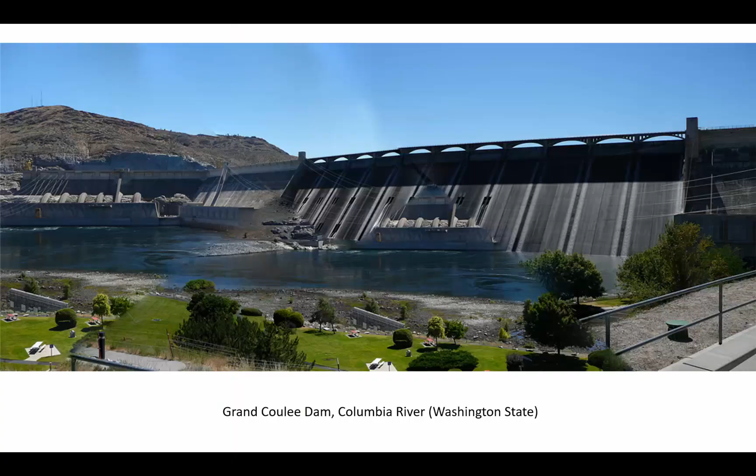The Grand Coulee Dam, which dams the Columbia River, has a multitude of really beneficial uses. On the one hand, it's excellent for flood control. They have the capacity to smooth out the peak flows that would come during periods of wet weather. They can retain that extra water behind the dam so that communities downstream that otherwise might be threatened by highly variable flows don't experience that same damage. So it has flood control benefits.

It also generates electricity, which is really valuable. Much of the Pacific Northwest benefits from hydropower. The cities of Portland and Seattle, I think, both get a big fraction of their electricity from hydropower. And another function of the Grand Coulee Dam is to control the elevation of the water upstream.

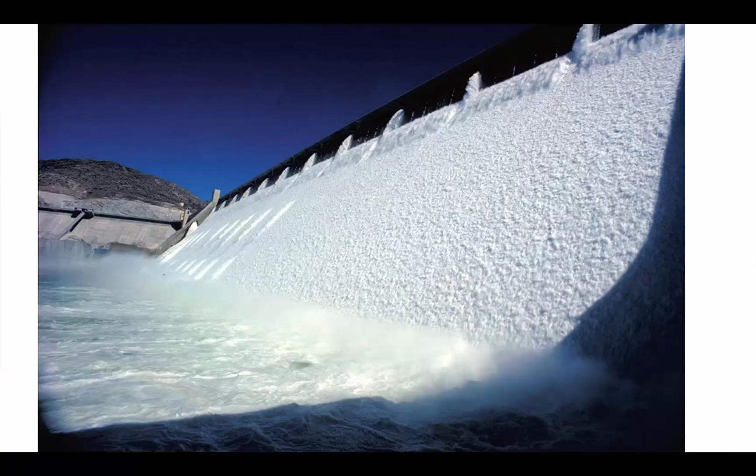The water that comes down the front face of that dam picks up a lot of speed. It's a tall dam. I maybe should have looked that up so I could put the statistic on here. But the flow down the front spillway of the dam, when the spillway is operational, means that the flow is going supercritical down that steep slope. And we're going to talk, starting next week, about hydraulic jumps. Hydraulic jumps are when you have supercritical flow that transitions to subcritical flow.

Thanks, Luke. 1483. I wonder if that's the elevation above sea level. That may not be its height from the base of the dam to the top of the dam. That would be spectacularly tall if that was the net height of the dam. I'm guessing that's probably its elevation above sea level. Logan says 550 feet from top to bottom. Thanks for looking that up. That's still pretty dang tall, though. 550 feet.

So we have to really understand a lot about what the flow is doing when it comes down the front face of the spillway. It's going to be moving at a fast velocity. And one of the things that Bernoulli's equation tells us about high velocity is that it can come with localized low pressure. This is more of an issue in enclosed conduits, where there's a penstock or a pipe that has the water from a dam going through it and discharging to the river below. If the water is moving really fast through that pipe, there can be locations where the pressure drops below the vapor pressure and there can be cavitation.

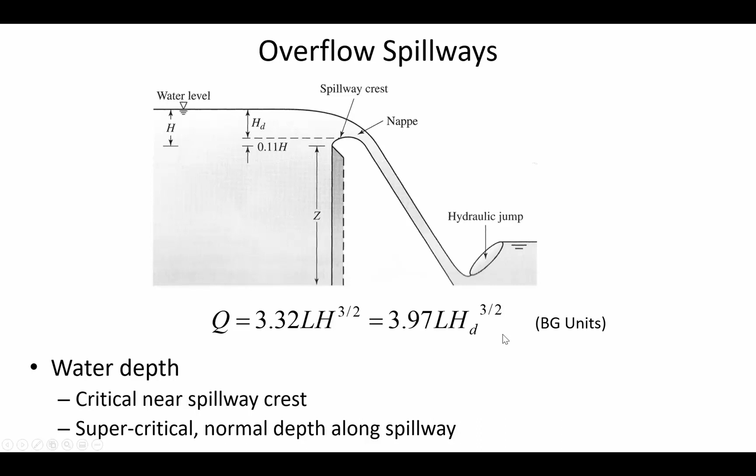All right, so just to get a feel for how this equation works, we're going to say that we do know the elevation of some structure upstream, that we want the water level no deeper than 4350, and that would be the elevation above sea level. So if the water level should not exceed 4350, then what we're trying to figure out is what elevation the spillway crest should be built at. And we know what our anticipated maximum flow over that spillway is going to be.

So we want to pick the elevation for the spillway so that it can pass 38,000 CFS. So if there's 38,000 CFS, there's going to be a certain height above the spillway. Now it may be that this is for the 100-year storm. So what if the 1,000-year storm comes around and there's 45,000 CFS? That just means that the water level would be even higher. But our analysis for purposes of this example is just figuring out what elevation should the spillway crest be at if we have this 38,000 CFS.

So here's our formula. You know Q. L is the length of the spillway. So here it says it's 300 feet long. That length that it's talking about is this length, the lateral length that the water is flowing over. Okay, so that's the L. Essentially what we're doing in this example is you're solving for H sub D in order to find the elevation the spillway crest should be built.

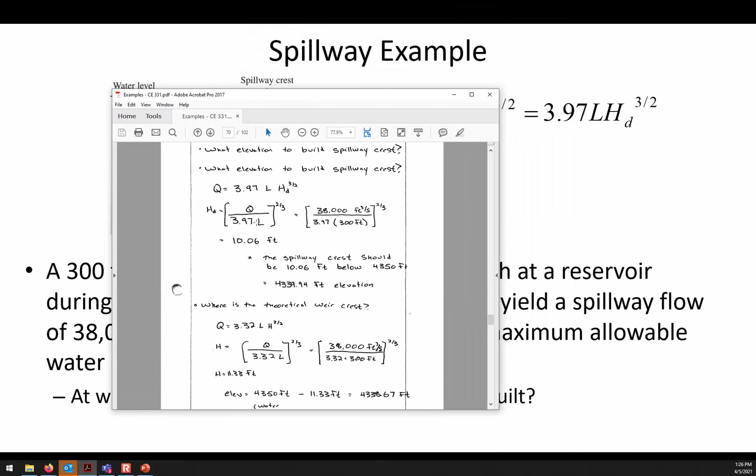All right, so let's take a look at the solution to this one. It's not rocket surgery, as they say.

All right, so we can just rearrange the spillway equation to solve for H sub D, because we know what flow rate is going to be passing over there. We know the length of the spillway. We just want to know how high is the water going to be backing up over that obstacle. A dam is an obstacle. The water is going to back up above it to have enough energy to get up over the obstacle. So 10.06 feet is H sub D.

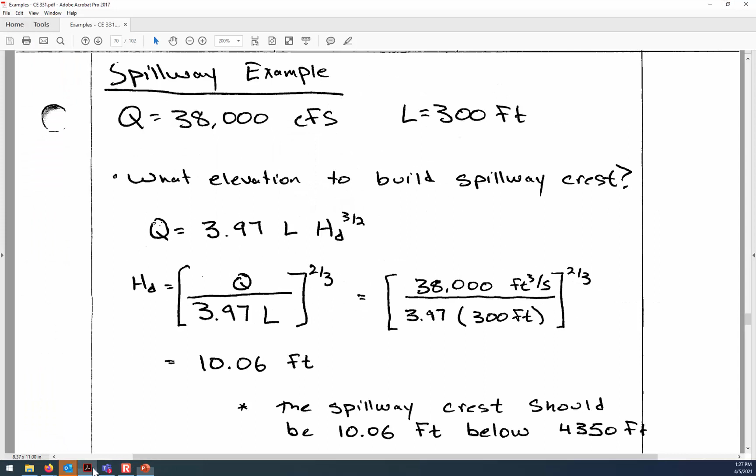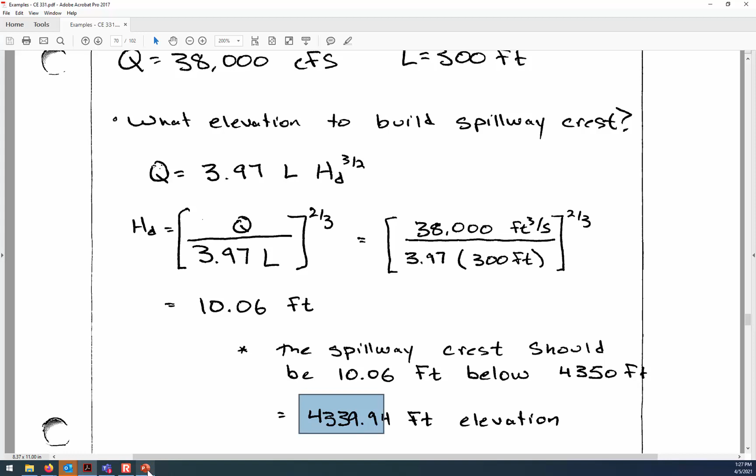And so this is asking what elevation should it be built at. So if the water level is at 4350, then that means the spillway crest should be 4350 minus H sub D. Okay, so that means we should build the spillway at 4339.94 feet of elevation. All right, well there we have it, spillway. Let's talk a little bit more about weirs.

Sadly, because this course is virtual this semester, it's not possible for us to go down into the lab. Part of the reason why we're going to finish early today is because we can't go down into the lab to actually watch a Broad-Crested Weir. In a normal semester, we'd go down to the lab for a few minutes of demo. But let me just show a couple of pictures and describe what's happening.

You remember that we were talking about specific energy in the past week and a half, and how when an obstruction is in the channel... This is a channel, it's clear, so there's glass on the back side, glass on the front side, and water is flowing from the left towards the right. Before this obstacle was there, the water was flowing at some depth along the channel, but when the obstacle was put in place, the water level was rising upstream, and then it finally comes into equilibrium again when it doesn't have to rise any longer.

At first it was rising because there was this barrier in the way. The flow depth was a couple of inches, and the barrier is much taller than that. You can see they've got a strip of putty along the side here, so it's a watertight seal. And so the water couldn't flow through the obstacle, so it had to pool. The water accumulated in was greater than out for this period of time while the pooling occurred. But then equilibrium is in equals out, and eventually the flow over the obstruction is the same as the flow coming towards the obstruction.

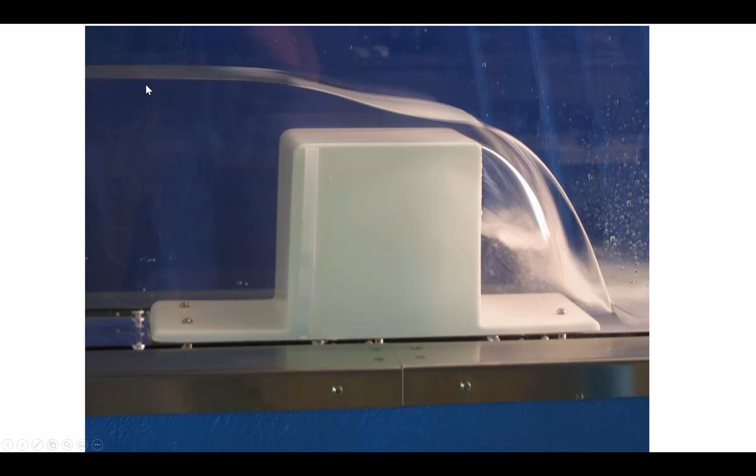So that equilibrium occurs when there was finally enough pooling upstream that the water could flow at the critical depth over the obstruction. Now, it's kind of tricky to know exactly which depth is the critical depth, because there's this drawdown portion as we have the water accelerating over the obstacle, and then there's this other drawdown portion where the water is accelerating off the edge of the Broad-Crested Weir. When I have been in our lab working with our Broad-Crested Weir, what I've observed is that the critical depth is observed about halfway to 2/3 of the way along.

And so I think that the critical depth would be right here at this location. And so there is a way with the equipment we have down in the lab to use a pin gauge and find out what is the depth of the flow above the obstruction, and with that y sub c you can find out what is the flow rate, because you know the flow per unit width and the relationship between y sub c and so on, and we can compare the known flow rate because we're using the hydraulic bench.

Remember our stopwatch and dropping the plug method. So we can quantify the flow rate that is being pumped through this channel, find out how many liters per second it is, and then we can try and measure different depths and find out what would be the flow rate. And what I've just observed is that the critical depth is about 2/3 along the length.

So what we're seeing here is flow at the minimum specific energy. We're observing that it achieves that critical depth, and then it flows at the critical depth briefly until it flows over the edge again. It's more obvious, this flow rate's kind of high. If the flow rate is so that the gap here isn't so large, then it flows at the critical depth for longer.

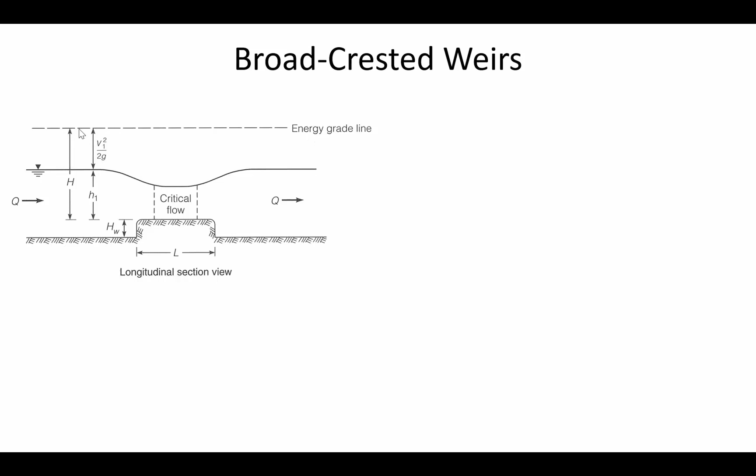And the energy grade line here is flat, because even though the depth decreases over the critical flow at the obstruction, the velocity was increasing. So in theory, we should have a flat energy grade line. In reality, the energy grade line is decreasing because there will be losses.

But this is our broad-crested weir, and they work by inducing critical flow, and the function of a broad-crested weir is it's a tool you can use to regulate flow and also to measure the flow rate. And that's the main functionality of a broad-crested weir, is if you know it's forcing the critical depth and you measure the critical depth, if you know the width of the channel, you can use that to quantify Q. And it's not as easy as you might think.

If you think about people who are irrigating crops, like a farmer, out west especially, in the western part of the United States, water is scarce. Not like here in the east where it's bountiful and oftentimes kind of a nuisance. In the west, farmers are allocated a certain amount of water, and there's a whole field of law, water law, that figures out how to settle disputes between landowners who have historical claims on limited quantities of water.

And so these farmers who are irrigating are only legally allowed to take a certain amount of water during a certain schedule each week, and it's on them to regulate the flow. And so to figure out how much flow is coming, they don't necessarily have fancy magnetic flow meters. They're not dipping propeller-based velocity meters into the flow. What they'll do is they'll measure the depth over a hydraulic structure like a broad-crested weir. So the purpose of them is to measure flow.

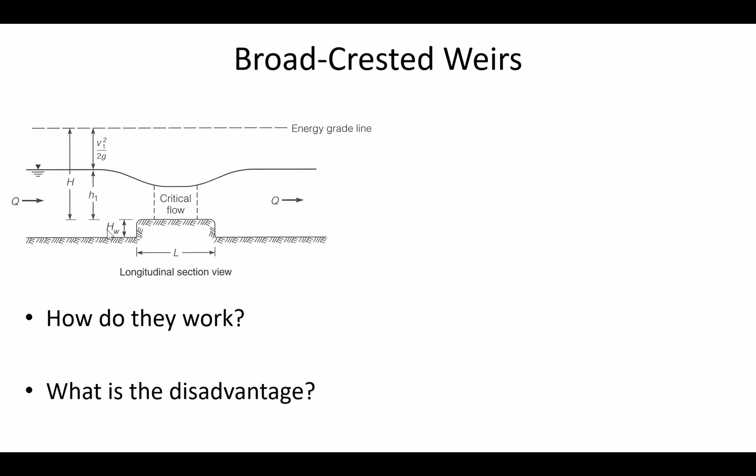The disadvantage, though, of a broad-crested weir is you'll notice it has this step, and sediment and trash and debris, rocks, things can accumulate in the front face of this broad-crested weir. So they have some disadvantages. In a hydrology course that I occasionally get the opportunity to teach, we talk about other hydraulic structures that are used for quantifying flow. And there's a special flume called a Parshall flume, which is used to induce a hydraulic jump, and measuring different parameters of that hydraulic jump to quantify the flow rate Q.

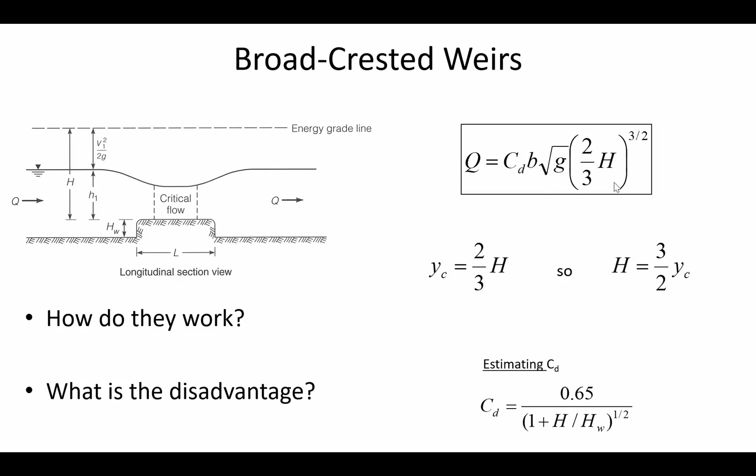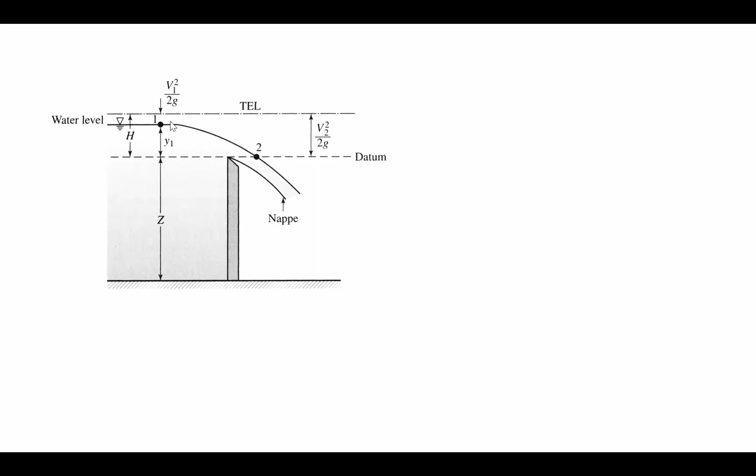And that should seem familiar to you if you remember the orifice equation, or when we solved the Bernoulli equation with water coming out of a jet. The orifice equation told us you can measure the velocity of flow by the square root of 2gh, where h was the elevation of the center line of the opening up to the water level. So here, we're taking the velocity head into account as well, because it's not just water coming from a stationary tank, but it's water that has an approach velocity. So h includes its physical depth as well as the velocity head. So it's a function of the energy upstream. So that's the equation we can use for a sharp-crested weir.